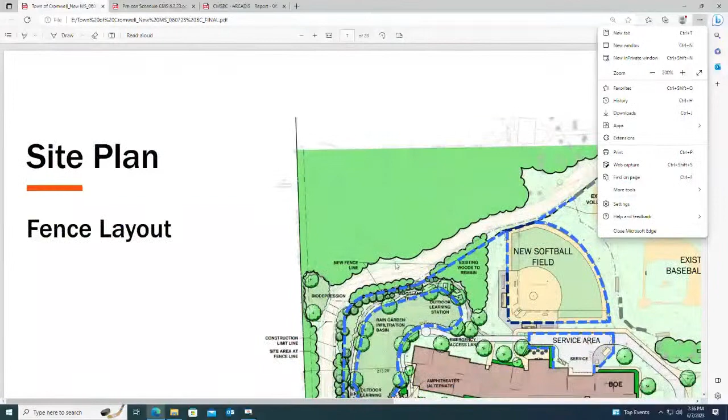There you go, perfect. So there's an outdoor learning area starting here outside the media center. There's another one in the center of the courtyard, then a third potential one here or the amphitheater, depending on if the alternate is accepted or not. And then there's just kind of a little wayside spot along this hiking trail that circulates through the woods.

Can that outer fence on the west side be reconfigured and just connected to the retention pond fence? Can I get up and point? Yeah, go ahead. I think what Joe's saying is you'd lose the path. Yeah, then we lose the path.

You could put a gate here, but then the path would be outside the fence, and that would go against school policy. There's already a lot of people walking along that road when you drive through there. But that path is within the school property itself, so it's not going to be general public access.

If you put it outside the fence, we can't take kids out there without a permission slip because we can't take them off school property. It's still school property, it's just now fenced-in. I can't take them outside the fence, or even go to the pavilion, unless I have a permission slip because they're off school property.

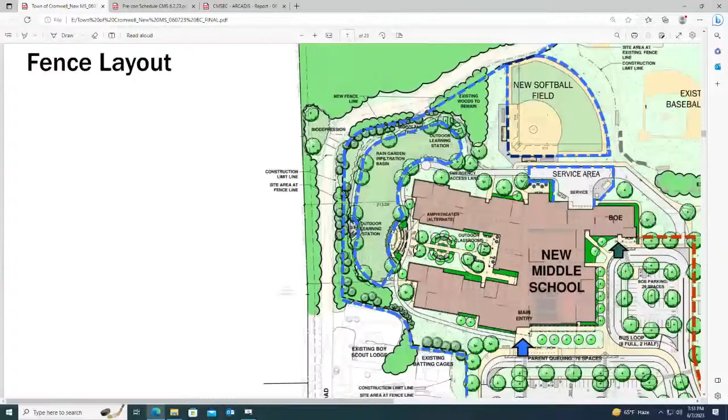Makes sense. So I'll go back and keep it, but let's see what the cost of the ornamental fence is. Right now it's 6 foot, so if we drop the height to 4 and change it to ornamental, what's the delta on that?

At the same token, I think we'd want to take that red fence that's on there now and change that to a chain link fence. That was one of the ones the design subcommittee wanted to make sure got accepted. Now, how high is that chain link fence? The reconciled estimate says metal picket fence, 4 feet high, $150 a lineal foot. Chain link fence, 6 feet high, was $95 a foot.

It's like $70 a foot more, a significant difference. The solid wood board fence along the soccer field, 6 feet high, is $200 a foot, plus the maintenance. That was the wooden one on the right, the east side. Their original plan was for wooden 6-foot privacy.

But now we're doing chain link with privacy slats as the recommendation, 6-foot vinyl coated with privacy slats. And how much is that? Did we find out? The savings would be almost $139,000.

Plus you don't have the maintenance of a wood fence with soccer balls being kicked at it. There are maintenance-free wood fences, by the way. Typically a 4-foot or a 6-foot fence, but what do those cost? They have roots and leaves, probably not the wood fences they're thinking of.

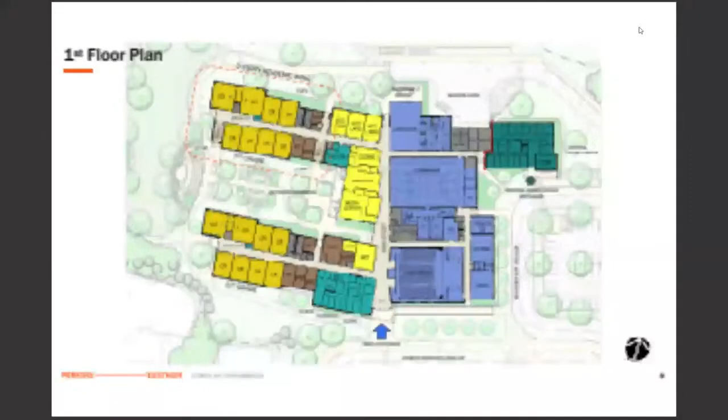And then concrete around the soccer fields. What do you do with that? Okay, we'll vote on all this stuff at once when we get to value management.

All right, so reducing the walks by 25% - this we had to reject because the walks are sized for egress paths and egress widths, so we cannot. So we don't have extra walks that are not necessary.

Okay, what's the width? I think I asked that in the meeting. It depends on where it is. Oh, so it's based on the egress width and egress capacity. Why was that even on this list then?

I guess some of these items were suggestions by the estimator without necessarily considering what the impacted design would be - things they've done on other projects, well hey, if you've got this, maybe you need less of it. So some of these were speculative.

Okay, all right, so this width is set by the egress capacities. These are all set by getting a truck out there. So there's no extraneous space - maybe in here you could, but there's a lot of traffic, that's convenience, because you have parent drop off and the bus, and everybody's coming in that direction.

For the reduced plantings, I spoke to Richter and Cegan. Oh, that should not have been accepted, that should have been rejected. I talked to Richter and Cegan about the plantings, and what they said is what's in the set is what would be required by planning and zoning.

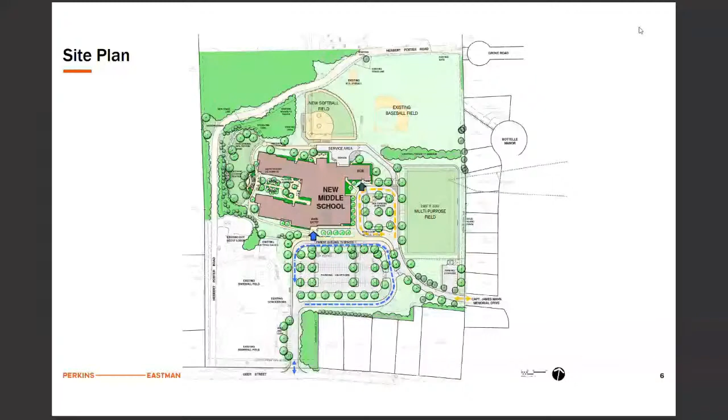Okay. And then delete play fields was rejected. So I will update this when I resend this out tomorrow morning for your record. So is this what Heather, when you opened it, you said about 800? I did the rough math, but you said there's this much dollars in VM items that were discussed.

I mean, this is adding up to close to $1 million, right? Yeah, there's more, this is just site, not all we talked about. Can we vote on the site item separately then?

The differences being on here are that the alternate goes away and we're going to chain link privacy. We're rejecting the stone dust one. So just go through each one and vote. I was going to take a motion to approve with changes. Oh, I understand now, I'm sorry.

So basically everything on here, correct me if I'm getting these wrong, the alternate for the solid wood fence would no longer be an alternate, it would go to chain link privacy as an accepted change. The stone dust gets rejected. We'll keep stone dust. Then the ornamental fence to chain link at the edge of the field, that's in there, right? So you're saying you want to keep that.

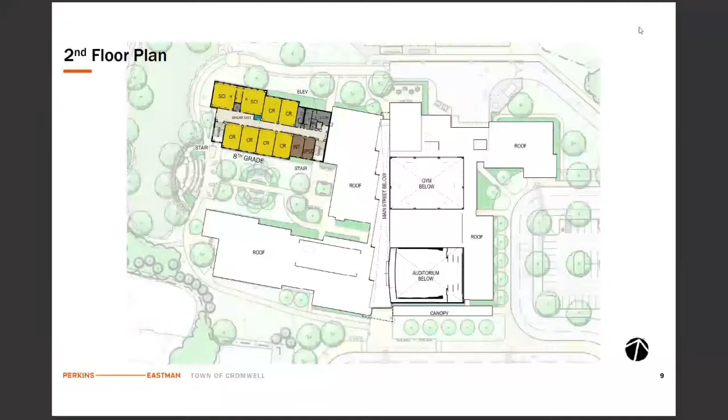So what you're talking about here, does that represent the $147,000 savings, or is that all in? So right now we're saying that the savings are reducing by 50%. We don't think we could accept that 147 based on what was in the documents.

Is that correct, Tom? Yes, the way you explained it the other day, it's gonna be some savings, but we won't get the 50%. So that number is to be determined based on what was shown.

What happened to no screenings? Because we talked about with planning and zoning, it doesn't have requirements for it. But our understanding is that they'll be looking to see screenings from the road and from the public way. So they don't have anything written, but they have an expectation.

And then eliminate operable windows. This is pending. I spoke to CES today. For the design of the mechanical systems, the operable windows are not an issue for the mechanical system. The system is designed to meet the loads of the spaces, and the operable windows won't impact that. Meaning, if you open a window, it's not going to impact anything? Correct, but there's energy loss and you'll spend more money, but it won't change the sizing of the system.

And the operable windows were for like second floor, first floor? It's in classrooms throughout the building. How often do you open windows? Well, rephrase that - if you're in an air-conditioned building, how often are you going to open the window?

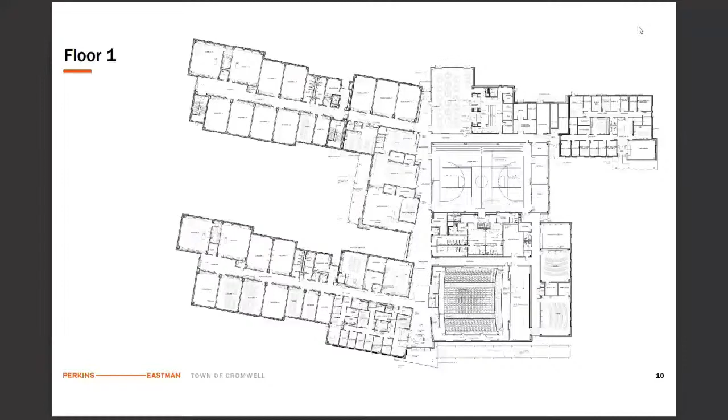Carpet on the aisleways or the walking paths, and polished concrete where the chairs are.

Solid surface to plastic laminate - this is for both these two numbers. One was for countertops and one was for sills, I forget which one was which. We don't recommend using plastic laminate if you could avoid it. It's less durable; the solid surface will hold up longer, especially in a middle school.

Main Street porcelain tile to polished concrete was rejected. Again, we felt this wouldn't really match the aesthetic you're looking for, and it's more industrial looking potentially. But we're going to look to see if epoxy terrazzo could be an affordable option in lieu of the porcelain tile.

So Newfield's looking into that. If it is, that would be a great option as well for a material. The toilet room flooring, mosaic tile, the 1x1 tiles to epoxy resin - this was accepted. It's only $21,000 savings, but it's less maintenance over the long term, with the grout being more porous and getting dirty. So this one was accepted - epoxy resin looks good and it's durable.

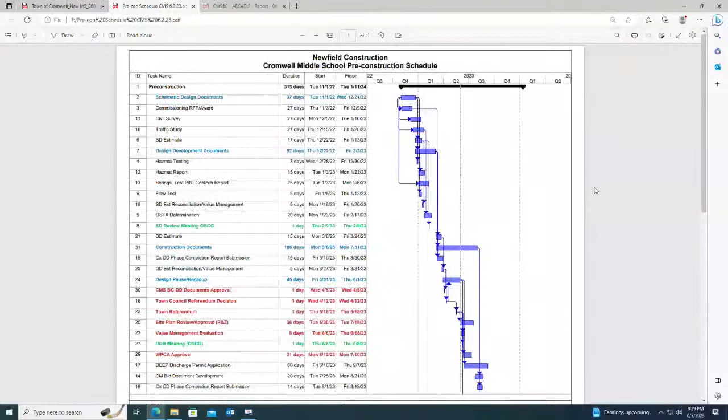Oh okay, so did we get bumped out three months then? Yeah, that's correct, 2 months. I thought we were starting on October 1st for construction, and then 2 months would have put us to December. Now we're saying January 1st.

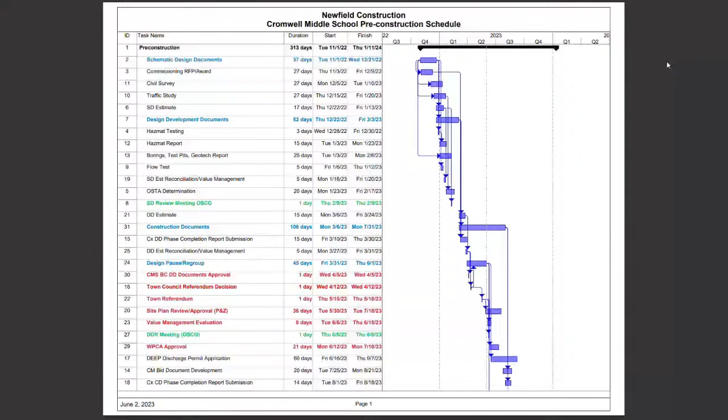Some of this stuff is just the DEEP discharge permit application, bid document development. These are all items that have to be done before we can go to bid. So I guess I go to the next page with this. Okay.

Here's some of those activities we talked about — the third party code review and threshold review, which is also a third-party review. Jack's going to get into that a little more. CD estimate right after the documents are done, then we reconcile the estimate. Local officials sign off — they have to sign forms that we bring to the final PCR meeting. And right now we have the PCR meeting scheduled for around the middle of September.

Once they approve us to bid, that usually takes about a week or so, because they always have comments that have to be addressed. A day or 2 or 5 days for adjusting the final documents, and we go out to bid in October. We allow 5 weeks for bidding with addendums, and then we have to scope out the contractors, so award recommendations

and contractor evaluation, 3 weeks. Apply for the building permit. And then we have to prepare the GMP amendment. We come back for your approval on December 6th. And then the town has to execute the document after this committee approves it. And then we finally award trade contractors around mid-December. And that's where it gets to another 2 or 3 weeks to mobilize. The contractors have to get their paperwork in place, their bonds and such. And we mobilize after the first of the year.

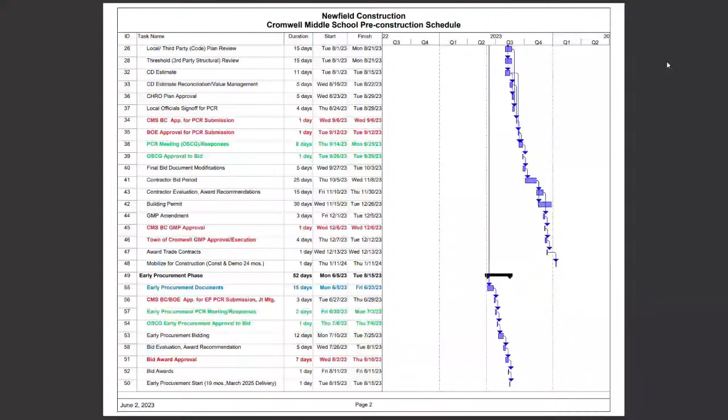Thank you. Yeah, the short version—we got money. Referendum passed. Yay.

Project cost adjustments—there were documents I had used in our discussion with the town council that we found had a misallocation of some of the dollars. Our $72.6 is still the right bottom line, but as Emily and I were breaking the budgets down between central office and the school itself, there were some things we had to divide a little differently. We provided that revised split to OSCG so they could get it into the funding bill.

So $4,285,000 is now the revised budget for central office. And I'll read the piece of paper in front of me because it's too far away—$68,315,000 is now the allocation towards the middle school. What was it before? It was $55,933,000 originally. It's probably in here somewhere—third page, fourth page, sixth, seventh page.